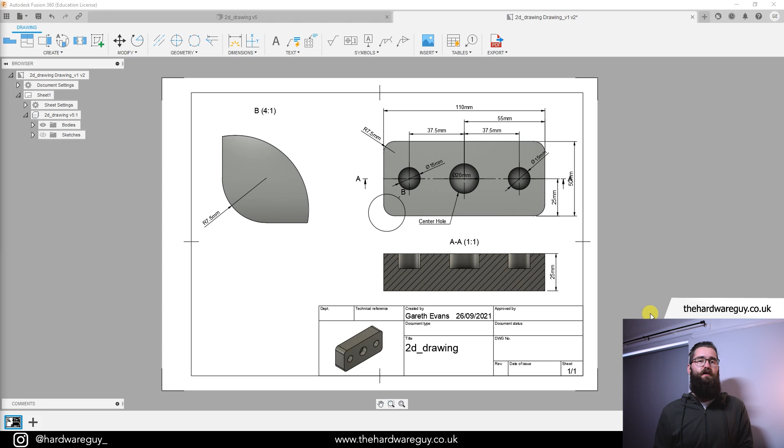It's just a good way of getting across all the information that's important about your design. So let's jump into it and create one of these for a simple design in Fusion 360. I've created a very basic design here just to show you the basics of drawings and some of the most important things you need to know to get started.

We're in the design workspace here, which a lot of you are probably already familiar with. So what we're going to do is switch to the drawing workspace. In the top left here, we've got this drop down. You want to click on that, come down to drawing, and from design.

Now you'll see a menu pop up here on the right, and what that's going to ask you basically is, do we want to create a drawing from a full assembly or a select part of the assembly? For now, I'm going to click full assembly, but if there's a part that you specifically want to pick out to add to your drawing, you can click select, and what that lets you do is select any component from the component tree, and that'll be used in our drawing. As I said, for now, I'm just going to leave this on full assembly.

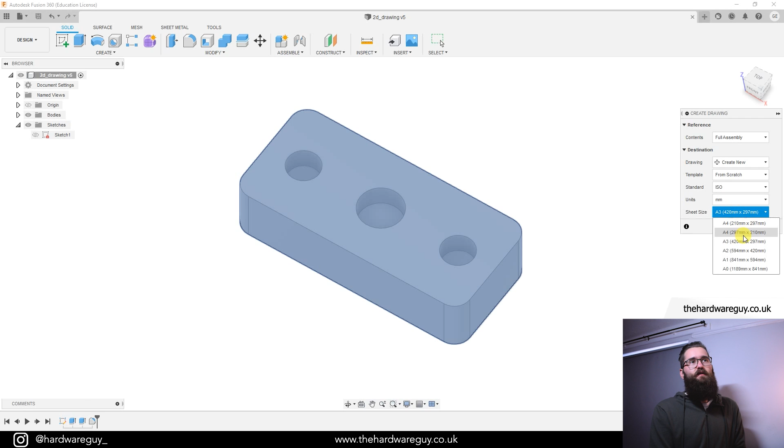Underneath are a bunch of specs, so for drawing, we're going to create new from scratch. These are the units, so I'm going to use ISO, which basically is millimeters, and lets me define a sheet size here in millimeters, or in the UK we have paper sizes A4, A3, etc. In the US it might be different, so you might want to go for ASME and select something else. I'm going to go with ISO, select the second one down here, which should be landscape, and then hit OK.

That's going to take us to a completely new workspace. As you can see at the top here, we've got a bunch of different tools. This drawing has opened up in a new tab, so our design is in a separate tab, and the drawing is in a new tab. As I said earlier, this has opened up a completely new workspace. We've got a whole bunch of new tools across the top, but there are things here that are familiar.

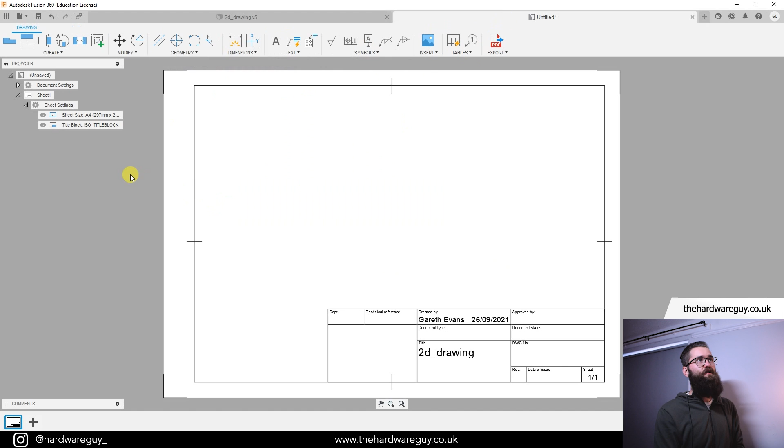We can see we've got the component tree here on the left, very similar to what we see in the design workspace, and that all kind of works the same. In the center here we've got, in this case, an A4 sheet that's landscape. We've got some details at the bottom which are common on a CAD drawing. And from here basically we can place whatever we want on this sheet.

But the first thing before we go and add anything, we're going to make sure we set up our document settings. So up here there's a tab called document settings, and you want to click that little drop down. In here we can define everything we want about this drawing. You can see you can change the font if you want to, there's tons of stuff.

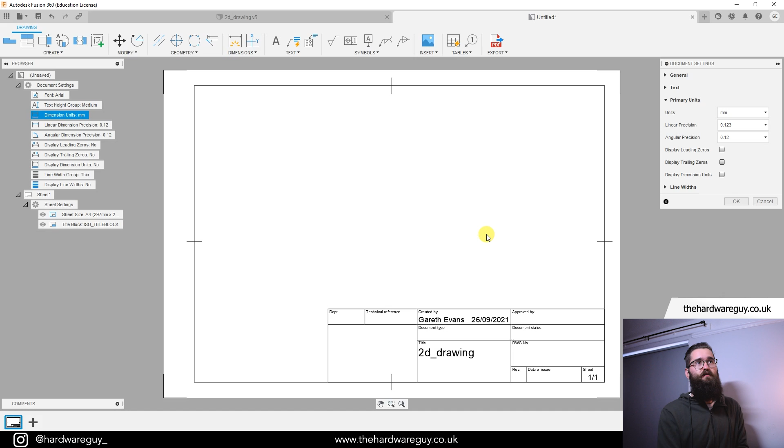So one of the more important ones here is dimension units. We're going to click on the little icon next to that so that we can edit it. We kind of set this earlier on, we've got units as millimeters, linear precision. This is important: by default, Fusion 360 sets this to 2 decimal places. I recommend using 3, just because if you have a measurement like, say, 0.275 of a millimeter, if this is set to 2 decimal places, that'll get rounded up. And if somebody's drafting up a CAD design based on your drawing, that measurement's going to be wrong effectively. So make sure you set these to at least 3 decimal places.

And I like to see the leading zeros as well, so I'm going to tick that.

And you can also do display dimension units, which I also like. So when we display our dimensions, we'll see the millimeter units on there as well. I'm going to tick that and then hit OK. And that's our basic settings done for now.

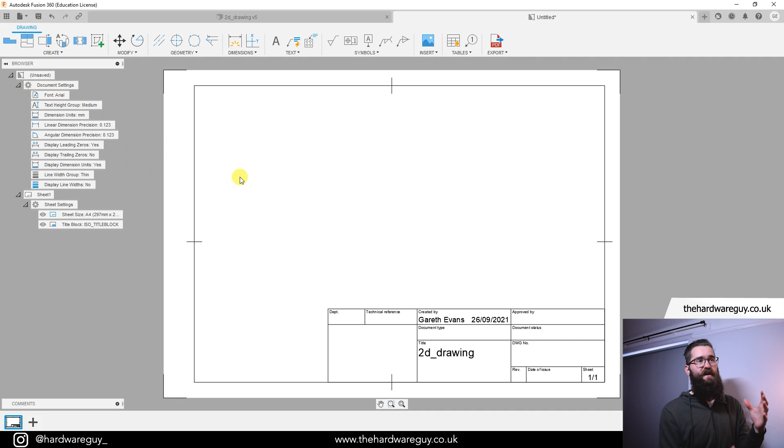So we're going to minimize that. And now here comes the fun stuff. So now we need to add our design into this drawing.

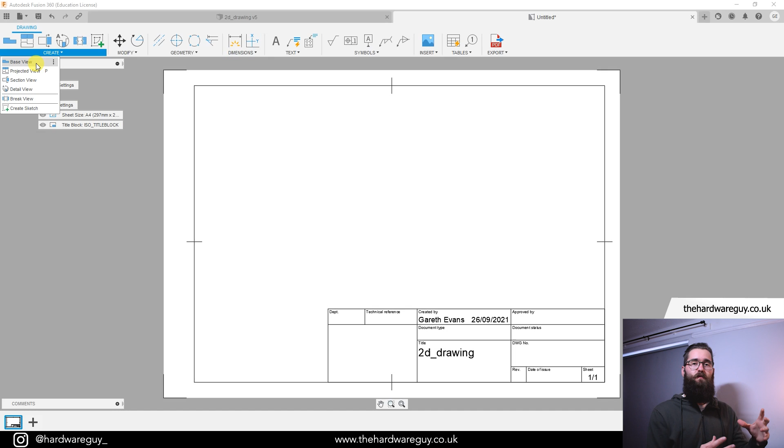All we need to do first is, if you look up in the top left of the screen, click on create. You can see we've got a bunch of different views here: a base view, a projected view, a section view, and a detailed view. Typically you always want to start with a base view because that's the main one that everything else inherits off. So if we click on base view and hover over our drawing, notice we can see our part here, and it's going to ask us to place it.

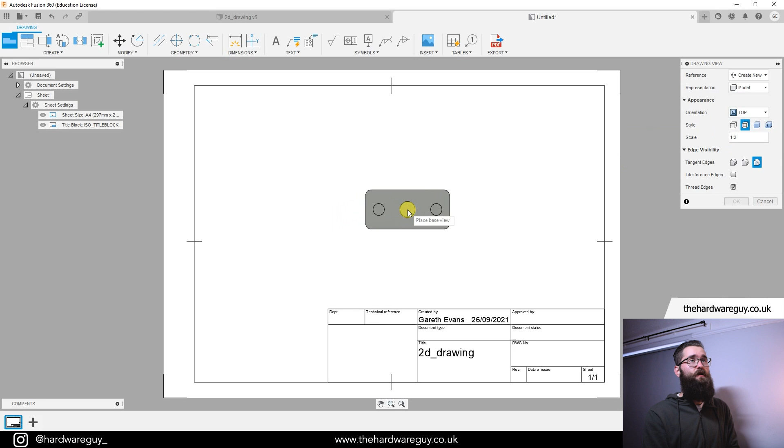Now there's a box up here on the right, and you can see there's a few different settings in there. We've got representation, that's going to be model. Orientation, I'm going to go for top, and you can see that's changed the view that we're looking at the model, similar to what you'd see in the design workspace. And then we've got style, and we'll come back to that one in a second.

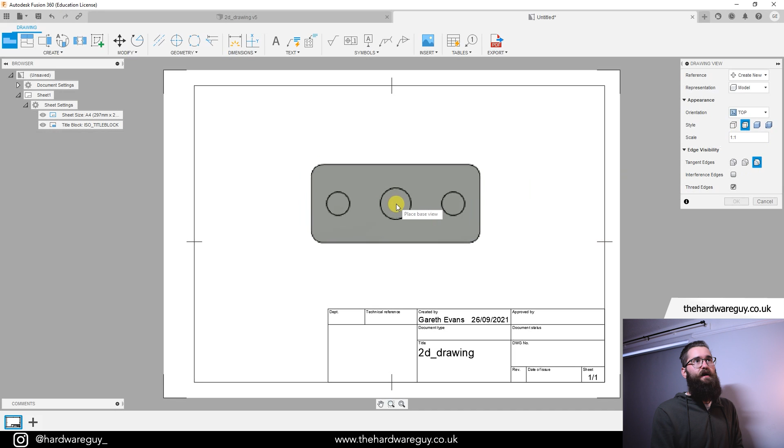But then we've also got scale, so depending on how big your sheet of paper is, that value is going to change. But for example, if I change it to 1:1, you can see that's changed the size of the design now in my workspace. I'm going to leave it at 1:1, and I'm just going to click anywhere on the screen, and that'll place that for me, and then I'm going to hit OK.

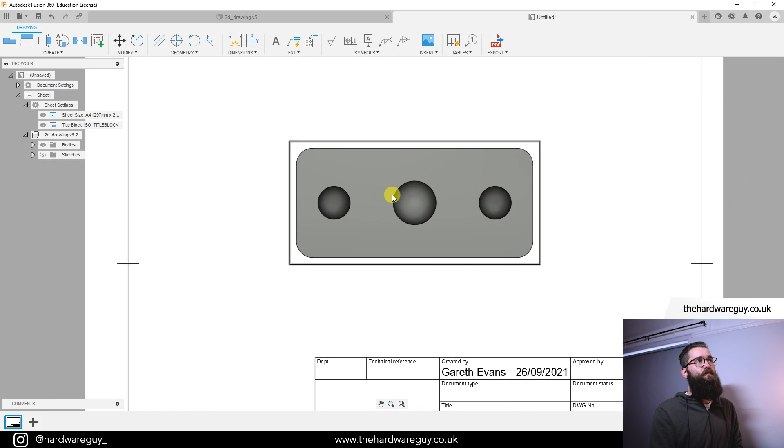Now you can see what that's done is it's added that top view of my model into this drawing. If I go and double click anywhere on this drawing, that menu will pop back up, and we can change the styles. If I go to shaded up here and click close, you can see we've now got the same model in there, but it looks a little bit different. Sometimes this is nice if you want to do a section analysis, which I'll show you in a second. But I'm just going to double click again, change this back to visible edges, and hit close.

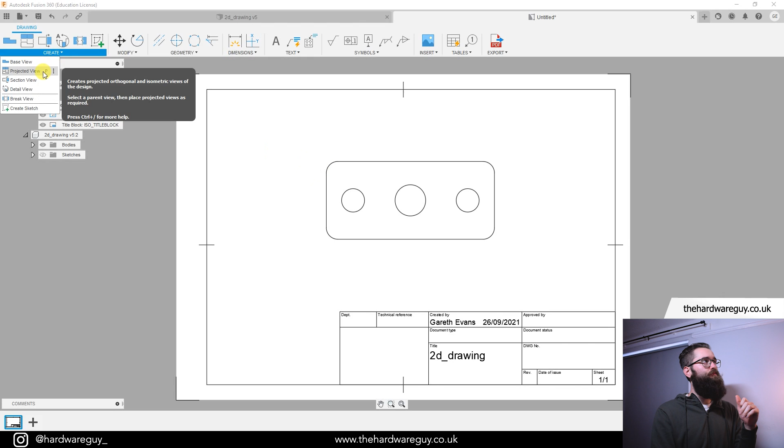So if you just wanted to do one view, you could click and place this anywhere, and you can continue and add some dimensions. But what I want to show you first is something called a projected view. So if we go up to create, click on projected view. This is really cool. What this does is it takes your base view and lets you add other views to the sheet based on which direction you move it.

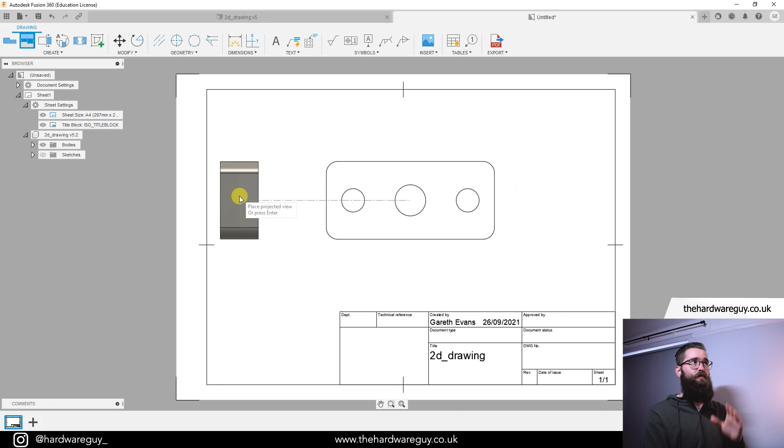For example, if I click and move to the right, you can see that we're now looking at my design from the right. If we go to the left, that'll change, and we're now looking at it from the left. If I pull down, we're looking at it from that front view, and if I go towards the back, we're looking at it from the back view.

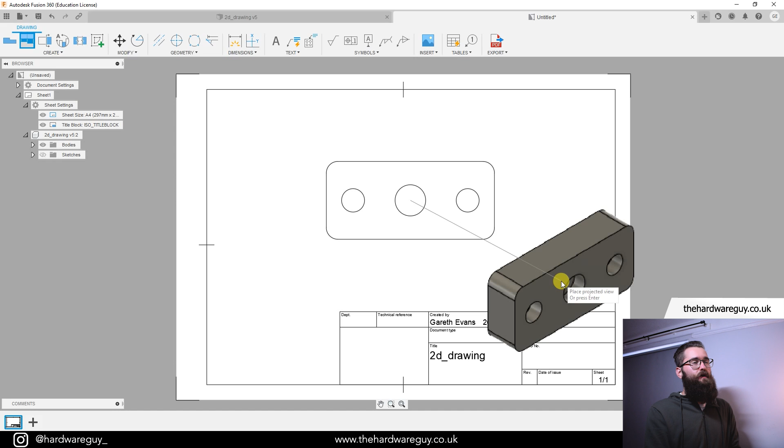So if we wanted to add all of these, we could. And if you drag down at an angle, you can see we get that sort of angled view. Now what I'll do is drag down at an angle to the right and just let go and click, and you'll see that little tick pop up. Just click that. Now I'm going to double click on this.

I'm going to change the scale up here to be 1:2, and I'm going to make this shaded and click close. Now I'm going to go and drag this down into this little box down here, and we may need to change the scale, so let's make it 1:3, click close.

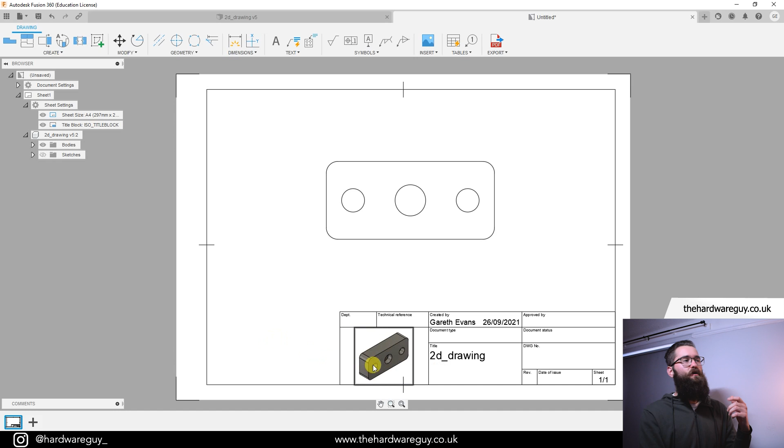Generally, sometimes this little box can be used for a preview of your model. So if somebody picks up the sheet, they can see what the model looks like, and then when they're referencing the actual drawings, it makes a little bit more sense. So I just like to leave that down there. You don't have to, I like to do it. Now back to the base view.

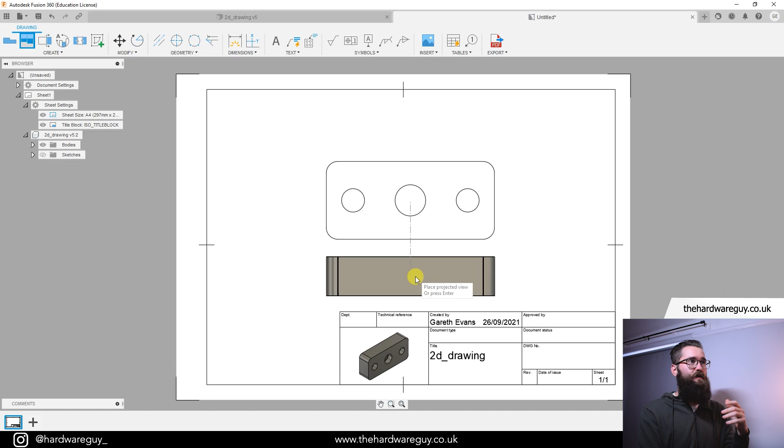If we wanted to go back and create a projected view, one of the views I'm going to need is the front view like this. So if I wanted to add a few of them in, I'll show you. We can just click, we're happy with that. We can go to create projected view, click again, move to the right. We could have that one if we wanted to. I don't need this one, so I'm not going to add it, but you get the idea. You can add whatever views you need. To get rid of this, you can just hit escape, and that'll remove that tool.

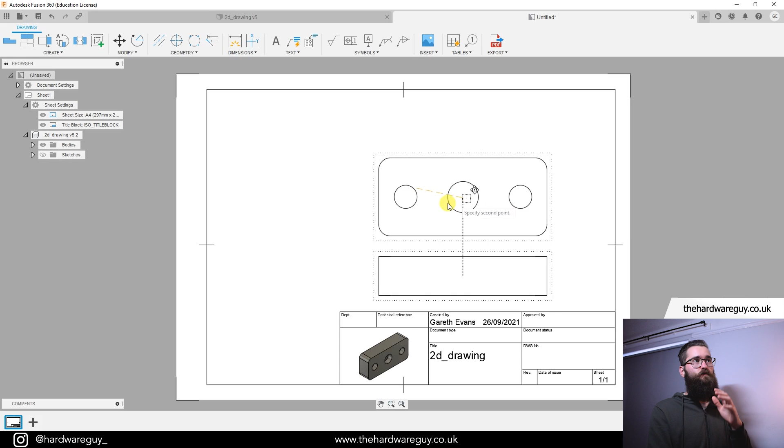Notice as well, if we move this one around, the projected view follows it because it inherits from that base view, and that's what I talked about before. You always want to place your base view first, and then any other angles you want to view from, you can do that this way.

So what we can do is add some dimensions, and this is important. Similar to what you'd see in a sketch, you can do this as a drawing. Up on the menu here, notice we've got a tool called dimensions, or you can just hit D on the keyboard, exact same as sketching. So if we hit that dimension tool, if I just hover over one line, it'll give me the entire distance of that line. But obviously I have fillets on the corner of my block here, so that's not really going to be useful.

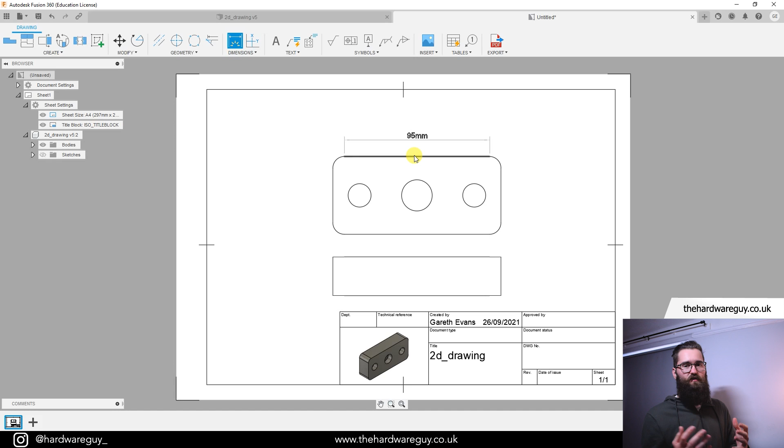Similar to sketching, you always want one origin point that you do your dimensions from, and in this case that's going to be the two very edges. So you can select one line, select another line, and add in your dimension, and that adds it in for you. If you want to move this around after you've placed it, you can click on the arrow and you'll see this little circle. You can just move that around like that.

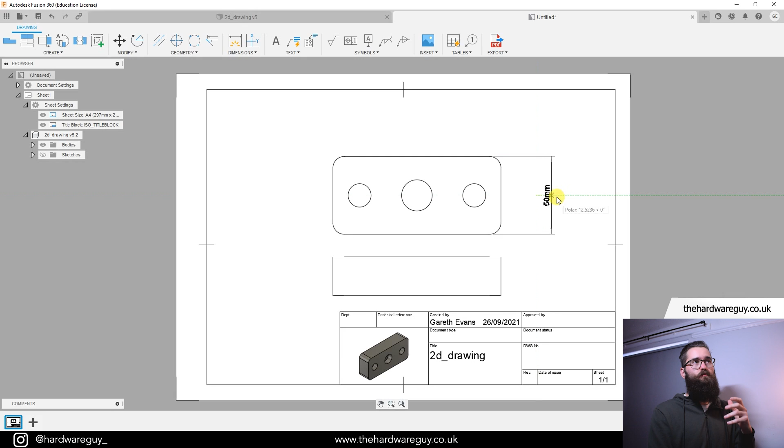Now one thing I like to do is adjust the text. The text is a little big here and I like to keep it quite clean. So if we go back up here to document settings, under where it says font, click the edit button next to it. We can set the font to be small, hit OK, and there we go. We can see we've got that smaller font there, which I like. But again, it's personal preference.

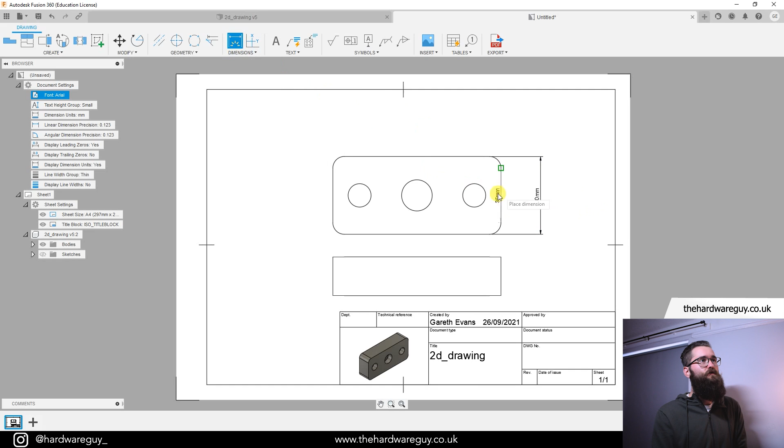So now let's do the same thing, but we're going to add a dimension again, but this time we're going to do the two vertical lines and drag that up. And now we've got dimensions for our width and our height.

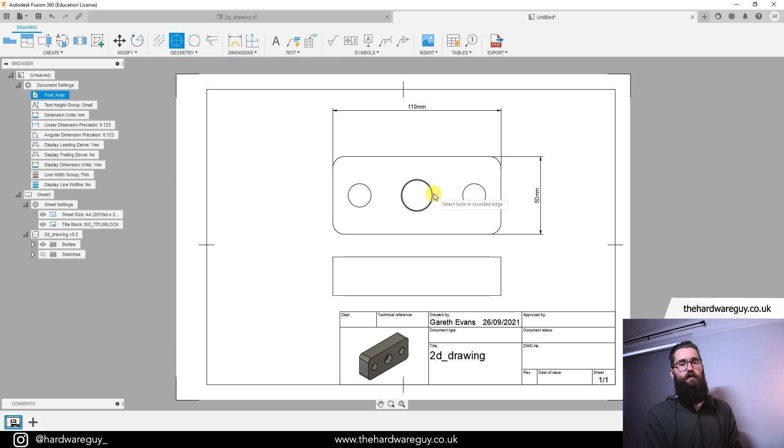And now what we can do is add dimensions to these circles. Typically what I like to do here is first add a center mark. So up here on the menu under geometry, if you select center mark and hover over any circle and click, it'll place a center mark for you. We're going to do that for all three circles here, and you'll see why this is useful in just a second.

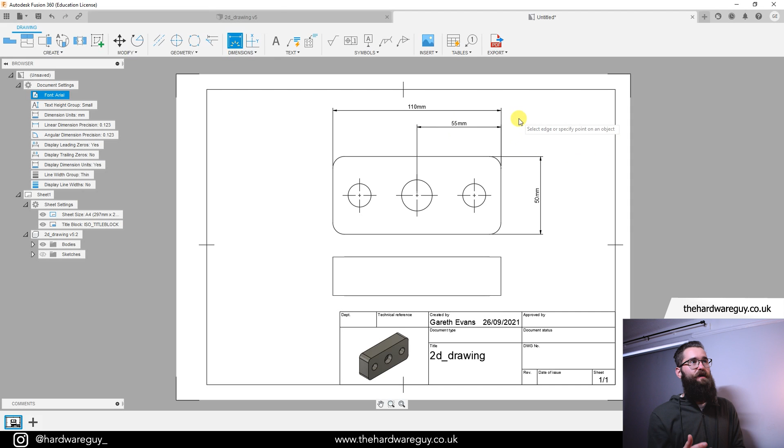So if we go back now to our dimension tool, and I want to add a dimension of this center circle, just like before, we can select the line on the right, we can select the center point of that circle. If we come up, similar to sketching, we can place another dimension. And as I said, you always want to be using one line as a reference for all your others.

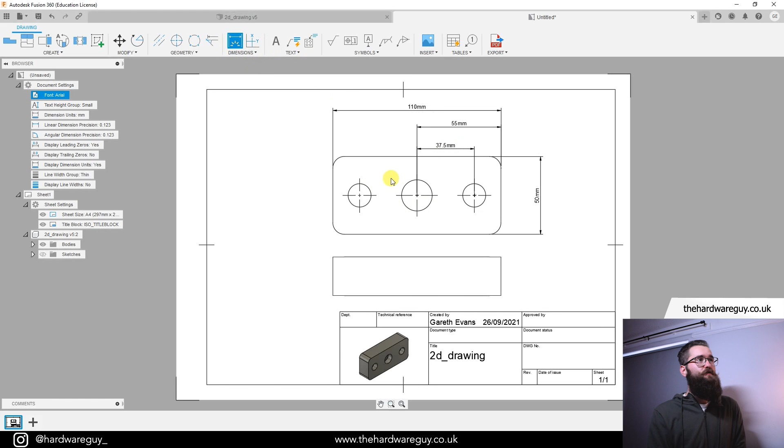Because we know this is halfway between the full length of this block, we can do the same here. We can go to dimension and set the dimension of these outer two circles from the middle one. So if we add these by clicking, just place that. Same again, we grab our dimension tool, click our center circle, click our left circle, pull up, and there we go. And again, just like before, if you want to move these around, you can click and you'll see that little icon pop up. You can just drag them wherever you want.

So let's go ahead and do the exact same for the vertical position of our circle. So if we click the center point, we click our bottom line here, come across, click again, and we can obviously see that's in the center, which is 25mm.

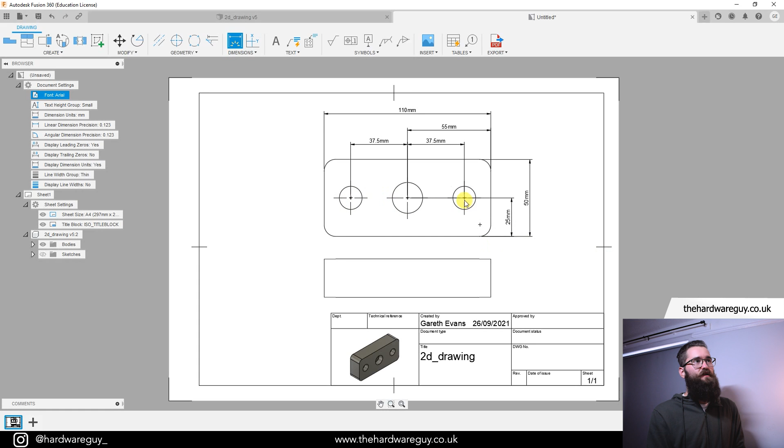Another useful thing to know is how to add a center line. In a sketch, sometimes you'll add a draft line to guide positioning for certain constraints. Even though you can see the center circle is 25mm from the bottom line, someone else looking at this design couldn't necessarily assume these are following that line too. So to make that clearer, go up to geometry, center line, and select two lines—it'll place a center line exactly between those two lines.

We want a horizontal center line going through the center of our circles, so I'll select this top line and this bottom line. Notice there's a line here now—if I click on it, two arrows pop up and I can drag it out to extend it. Now you can see clearly that there's a center line, reassuring someone that these circles are actually coincident with this center horizontal line.

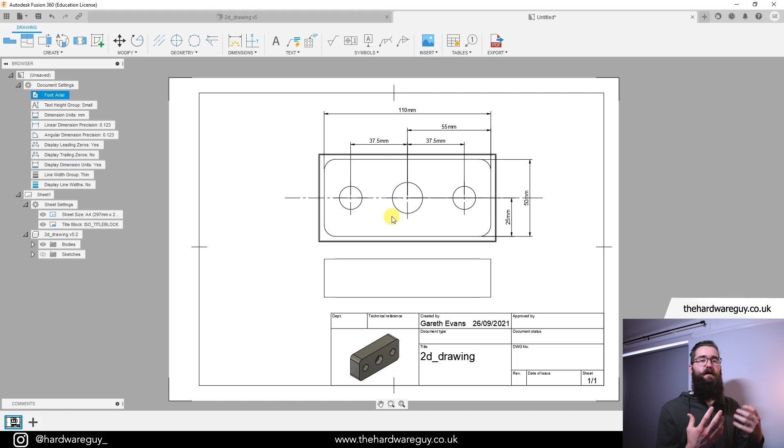These are the kind of things you want to think about when creating a drawing. The idea of the drawing is that you give somebody else all the information they need to reproduce your design or your 3D model. We can also add some dimensions for our diameter or radius.

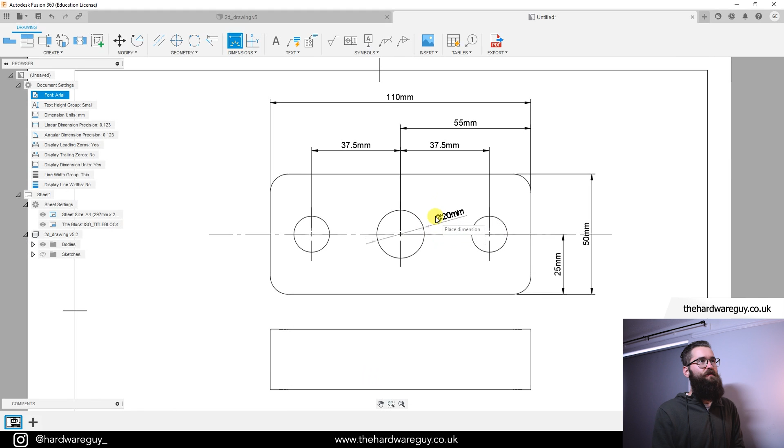If we go up to dimensions again, you can select the dimension tool, and if you click on the edge of the circle, by default it's going to do the diameter. But if you hit escape, come back to dimensions, you can select radius if you want to—and the radius is actually very useful for fillets too.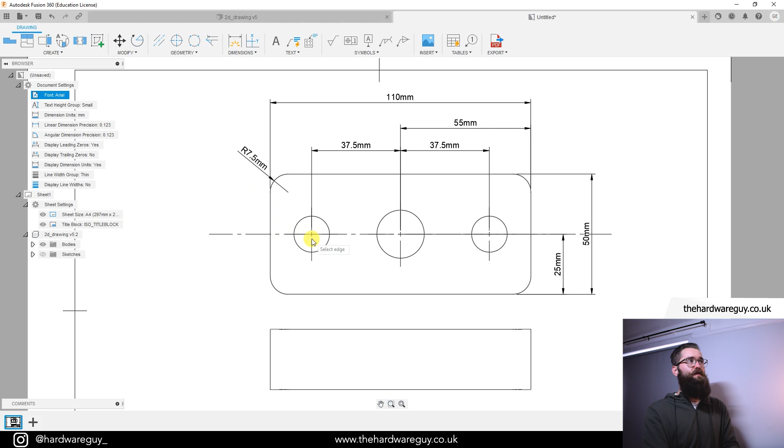If we select radius, you can see I've got fillets here on the corner of my block. Let's select this top left one, and I can just place this dimension down—now it's clear that fillet is a 7.5mm radius.

Again, if we grab the dimension tool, we can add these diameters in. I'm going to click the center circle—you can see that's 20mm—and place that down. I'll do the same for the outer two: place this one, that's 15, same for the outer one, 15. Let's move that around, and there we go.

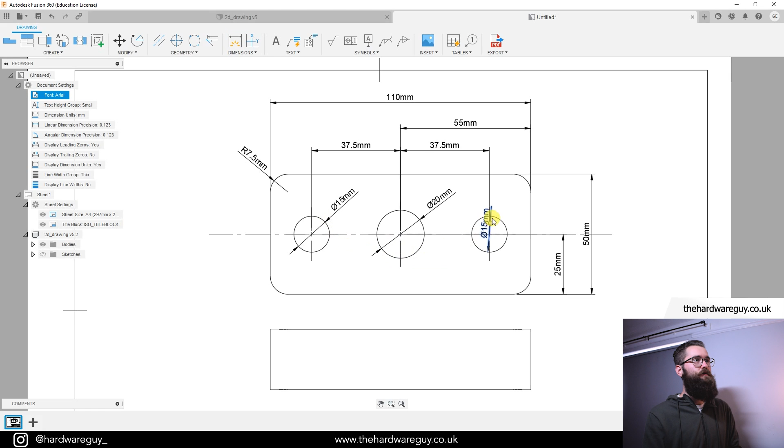It's pretty cool, very similar to sketching, as you can see.

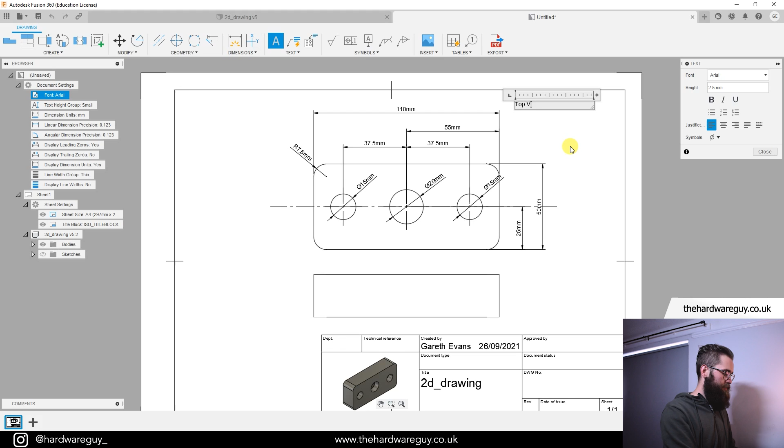One other thing I want to show you is that you can add labels and custom text. Next to dimensions here on the menu, there's a text button. If you click and drag, it works similar to the text box in sketching. You can enter something in here—I could say 'top view' for example. If you highlight this, you could change the font size—I'm going to make it 5, and we'll make it bold as well. Hit close, and there we go.

You can click and drag this around just like you normally would in sketching. I'm going to place that over here for now. The other thing you can do is add labels—this is useful for annotation, if you want to point something out in a design.

If we select the second icon across here, you can see it says note. Click on that—now you can click on any part of this design. I'm going to just select the center circle as an example, and if you click and drag away from it, you'll see this little arrow comes across, so you can type wherever you want in here. I'm just going to use this as an example. Then if you click off it, you can now see we've got that label here, and again you can move this around if you want to.

That pretty much covers the basics of dimensions. Now you can see here we have another view from our projected view, which is our side view, and the only other dimension we really need from this is the height. This top view pretty much tells us everything about the width, the length, how big the holes are, and the fillets on the edge. The only thing we don't know about at the moment is the height and the depth of those holes.

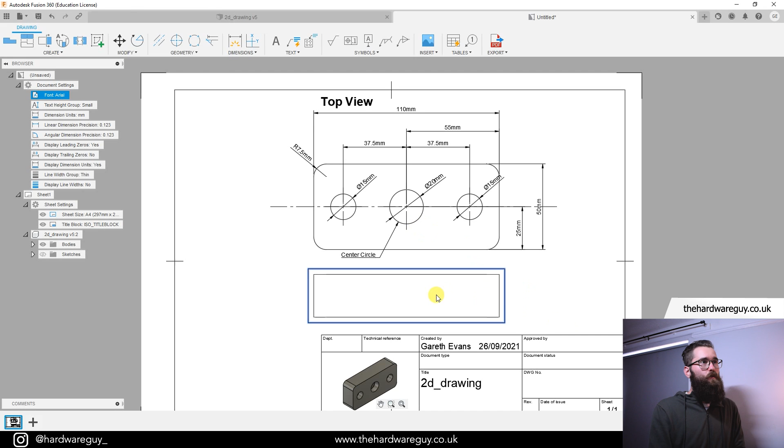What we can do here, as I said, I created a sort of side view by doing that projected view. But what we're going to do is delete that for a second. So if we click on it and hit delete on the keyboard, what we'll do instead is add a cross-section view.

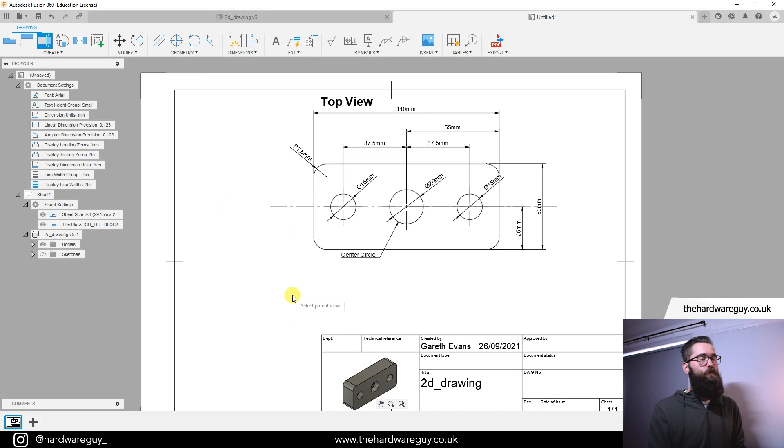And this is really useful. So if we go up to create, come down to section view, what you can do here is select 2 points on wherever you want to do a section cut. If you watched last week's video, I showed you section analysis and how that's useful for sketching and in the 3D workspace. This is similar to that. So with that tool selected, it's going to ask us to select the parent view, which is obviously this one.

And then you'll see a little arrow pop up with an A next to it, and that's point A. So I'm going to select this center line here, which you can see the little triangle pops up. I'm going to come across and select another center line, and then I'm going to hit the tick. Now if I drag up, you can see what that's done. It's created a cross-section cut in the very center of this block from that side view that we had before.

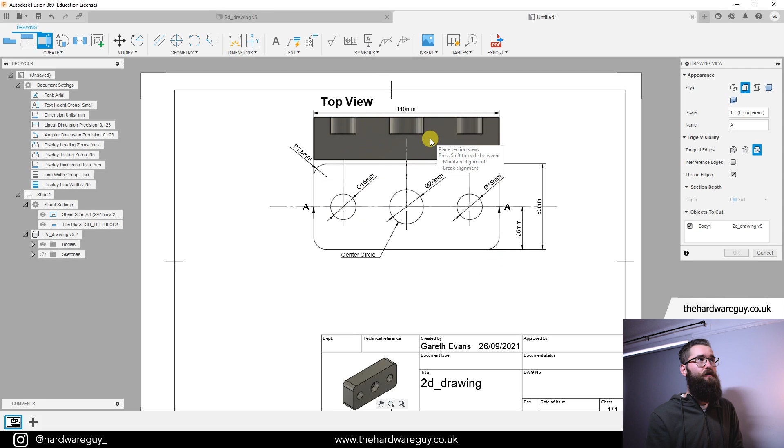Now if we click and just hit OK, we can also move this around as well. So if we click it and drag it down, notice this cross section has a label above it. It says A to A, 1 to 1. And what that's saying is this is a cross section from point A here to point A here. You can see those 2 arrows next to the A pointing towards the back, and that's telling you what direction the cross section is looking from.

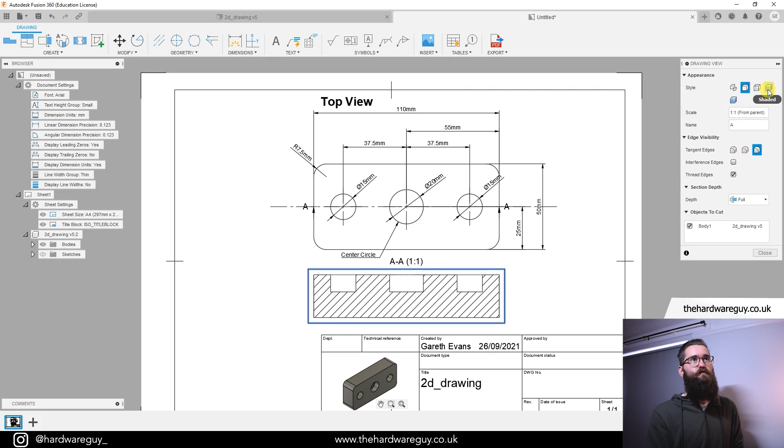So we're looking from this front side backwards, and we can see the depth of those holes. Just like I showed you before, if we hover over this, you'll see a bounding box appear around it. If we double click on that bounding box, that menu pops up on the right, and we can make those adjustments again. So if we want to make this a shaded view, hit close. You can see that shaded view looks really nice as a cross section.

And now we could go ahead just like we did before and add our dimensions in. So if I go up to the dimension tool, I wanted to add information about the height before. If I just go ahead and select the top line and the bottom line, come across, we now know that the height is 25 millimeters. And we can do the exact same thing for the depth of these holes.

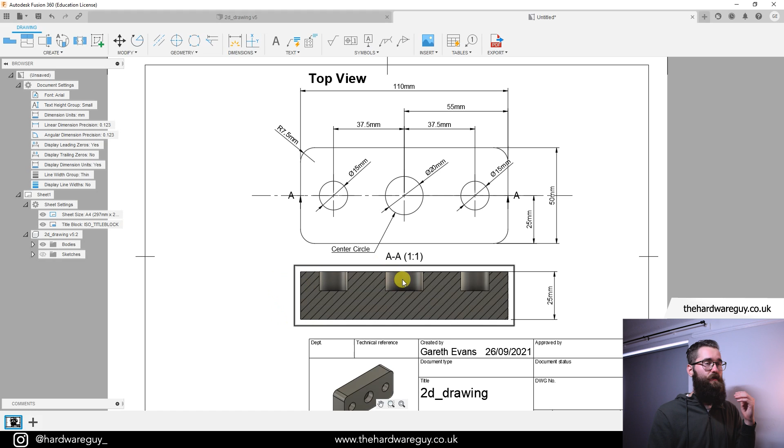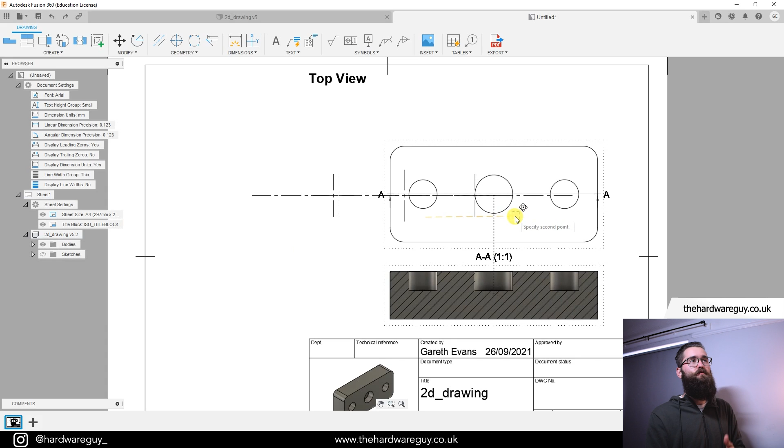So if we grab the dimension tool, hit D on the keyboard, we can select a point here on the top of our object, select a point at the bottom of the hole, drag to the left, and you can see that we have a dimension there of 10 millimeters. So again, if we click on this parent view at the top and drag it around, that bottom view of the cross section follows it around because this top view is the parent view and that's a child of the parent view.

One other thing I'm going to show you which is really useful is called a detailed view. This is particularly useful if you have something small on your design. So let's say in the corner here I had a really small little hole, and adding dimensions to that on this would look a little bit messy, or it wouldn't look quite right.

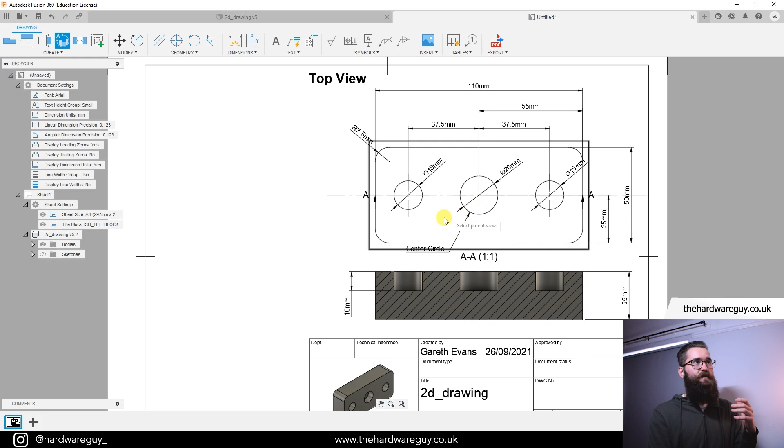So what you could do is go up to create, detail view, select a parent view again, which is obviously this one. Then it's going to ask you to select a point on the design. Now I'm going to select this bottom left fillet here in the exact center. I'm just going to click, and if I drag out you can see this circle. Now everything inside this circle will be part of the detail view.

So I'm just going to click again, and if I drag across now and click, you can see it's placed everything that was within this circle here, which is labeled B, has now been blown up a little bit larger on its own drawing. And in the menu again on the right, you can see the scale of that is 2 to 1. So I'm going to go ahead and make that 3 to 1.

You could even go bigger if you wanted to, but 3 to 1 is okay. I'm just going to hit OK.

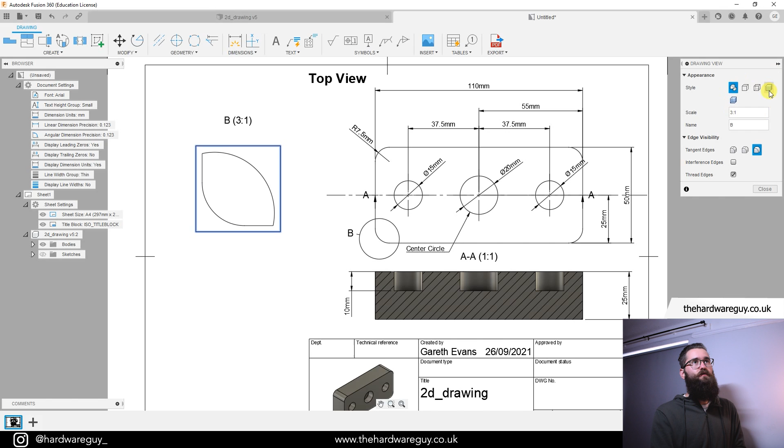And now we can see we have this section over here. If we double click the bounding box like before, I'm going to make this a shaded view by clicking this box here, hit close. Now what we could do is go to dimensions, grab that dimension tool, click on this fillet here, and I can add a dimension there. So you can see that if we had a small hole here somewhere, you could blow that up to make it easier for the designer to see. You could see all the details for that smaller object, and you could annotate it a lot more effectively.

You can also see that it's very nicely added a label automatically. It says B 3 to 1, which references this circle here, B, which is that detailed view.

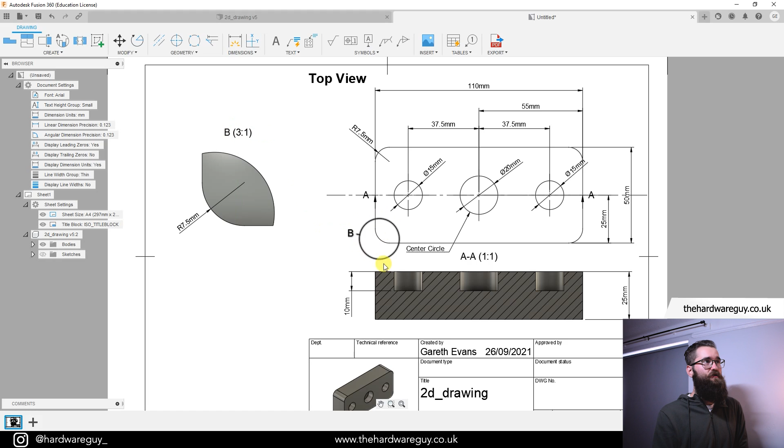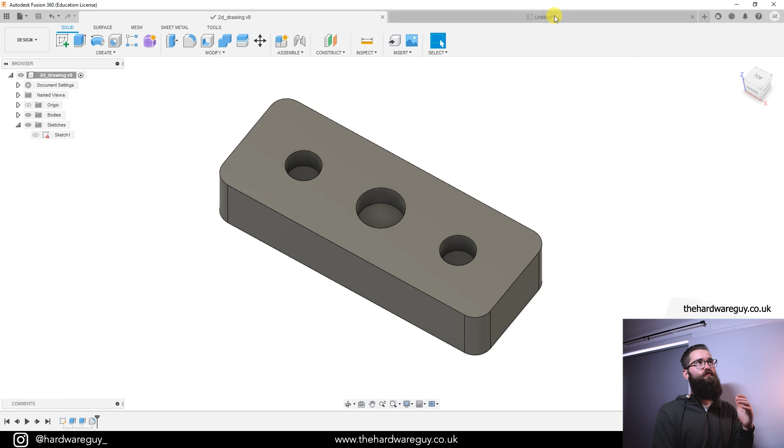So one thing you might be wondering is, what happens when I make changes to my 3D model? If I go back to the model, jump into a sketch, and change this dimension to 130, hit OK, finish the sketch, save the 3D model, and now when we go back to the drawing, in the top left here you'll see a little triangle, almost like a warning, and you want to click on that. What that'll do is update the drawing to reference our new parameters in the 3D model. You see that will have updated, and we've now got our new width in here of 130. It all works really quite nicely, and makes your workflow a lot easier.

Notice though what that did is where our detailed view is, that's slightly changed now because we had a bigger width. So if we click the circle here of our detailed view, grab the center point, we can still drag this around and change it wherever we want. So I'm going to replace that in the center of this fillet, and that's now updated that detailed view for us.

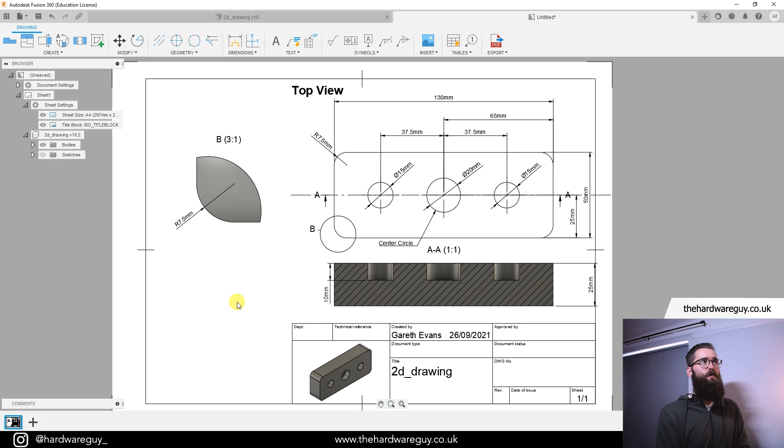Another thing that's pretty useful to know is creating additional sheets. So if you're working on something really complex, you're not going to fit it all on one sheet. In that case, you can create additional sheets. If you look down in the bottom left, there's a button that says Quick Add, and you can just click Add and create as many sheets as you want. One thing worth noting is this may be limited on the personal use license - you may be limited to one sheet, so just be aware of that.

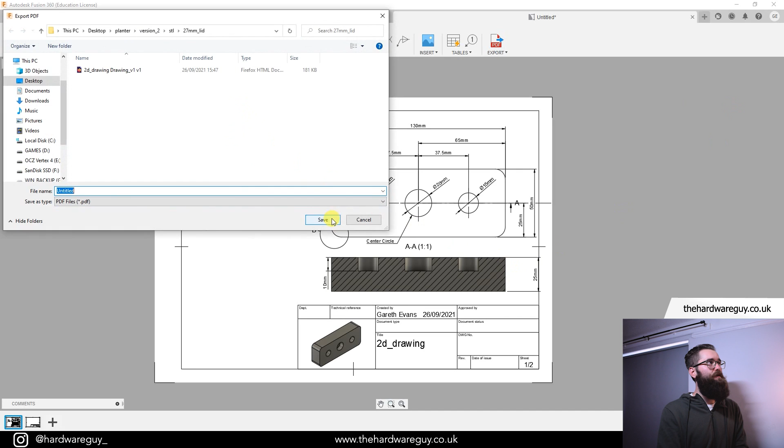The last thing I'll show you is how to export these as a PDF. If we go up to the top here on the right, you'll see a PDF icon. Just click on Export and Export as PDF. You can select all sheets or a particular sheet to save. I'm just going to click Open PDF, click OK. I can save that anywhere I want, so I'm just going to save it on my desktop. That should open that up in Firefox, and here we go. So this is the drawing I just created in Fusion 360. I now have it downloaded as a PDF, and I can use that however I want.

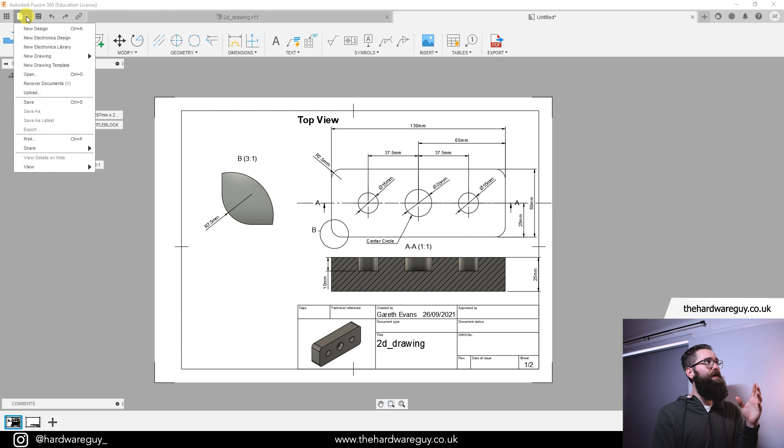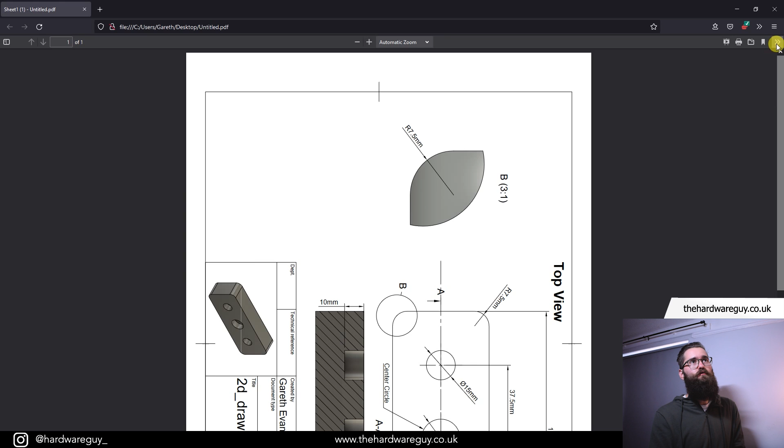Again, the export feature might be limited in the personal use license, in which case if you go up to the file icon in the top left, click on Print, you should be able to select Microsoft Print to PDF. Click on that, select your sheet - I'm going to use selected sheet 1, hit print, and that'll again ask you if you want to save it. As you can see, it saves it by default in a vertical orientation, but we can easily change it. In the top right here, there's 2 arrows - click on that, rotate anti-clockwise, and there we go.

We have our design exported from Fusion 360, ready to be sent to a manufacturer or a workshop, or even just stored in your own workshop in a folder somewhere. Always useful to keep these around, and it's good practice to create these for your own designs because it can help improve your own workflow.